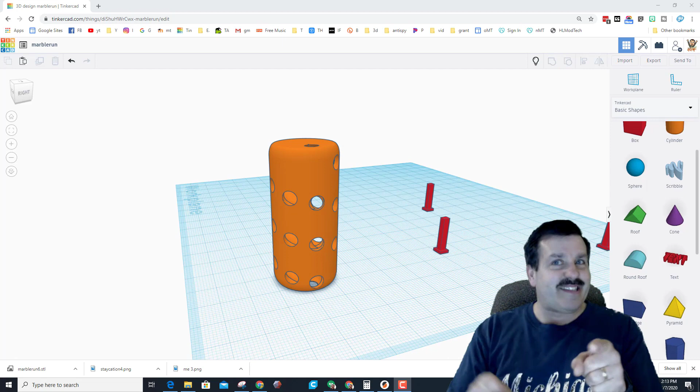So first things first, we are in Tinkercad, and I'm going to duplicate this little dude, set him to the side, and let me ungroup him so you can see what he's made of. If I take his outer skin and hide it, you can see that is a tube. So it's easier for you to see the tube, instead of making it a hole, I'm going to make it a solid for a second.

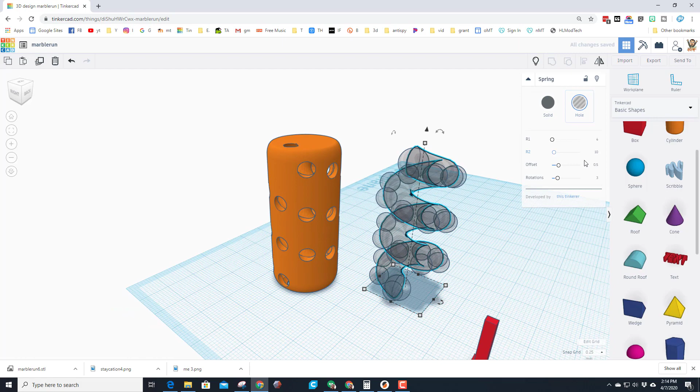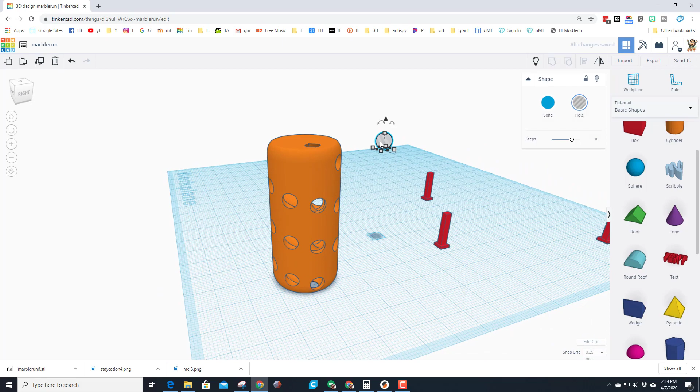So I made a gray tube that is a little bit larger than an airsoft pellet. And then I put these spheres around that are a little smaller than an airsoft pellet, so that when I group it all together, we get this awesome design over here that has a track for an airsoft pellet to run through. So when it is finished printing, the goal was for it to have that cool track that the pellets can go up and down, yet there won't be a hole to get the pellets in.

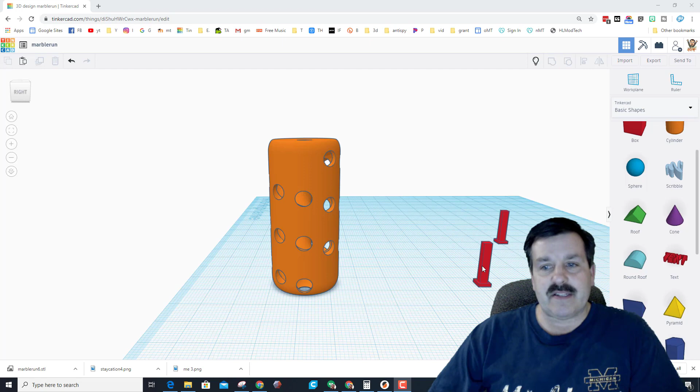So the whole idea was that as it was printing, I would drop the little airsoft BBs in, kind of like the ship in a bottle where you have to ask how the ship got in there, but I would have airsoft BBs inside here. The trick for me was I built this little pillar over here off to the right so that the print head would have to move over.

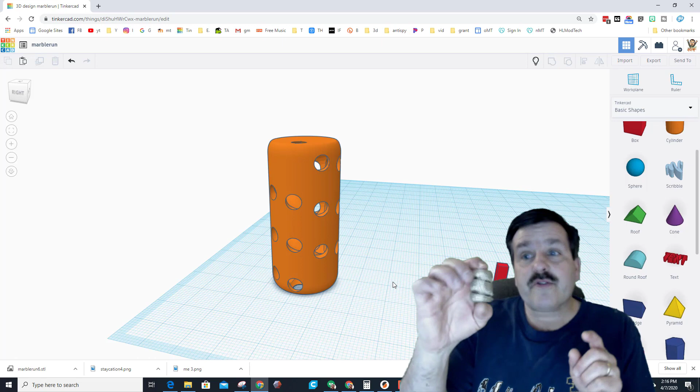Now I'm going to be honest with you, my first design didn't have that. I actually forgot the print head would be in the way and thought I was going to be able to just make that work. But once I added this in, I was able to make it do what it was supposed to. So there were other trials and errors too. This was one where the entire way up I had the design of the tube sticking out, but there was way too much stringing because that was hanging down below, but still kind of a neat idea.

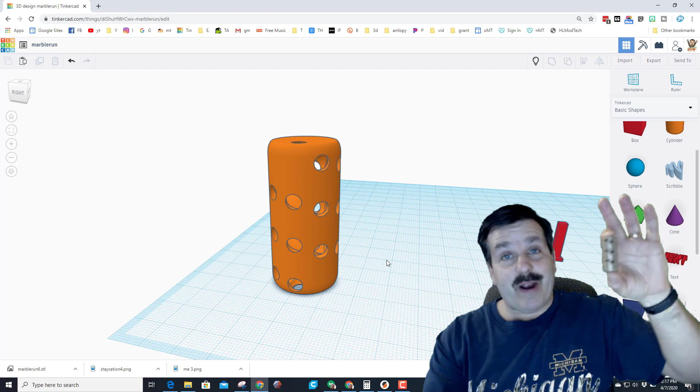So alright, here is the final one. When I flip this over, they run down the channel. You can see there's a blue one and a green one in there. I could have stuck in more. You do have to time it right. I'm not going to lie to you. I have had several times where I started printing this, got busy with something else, and I missed it.

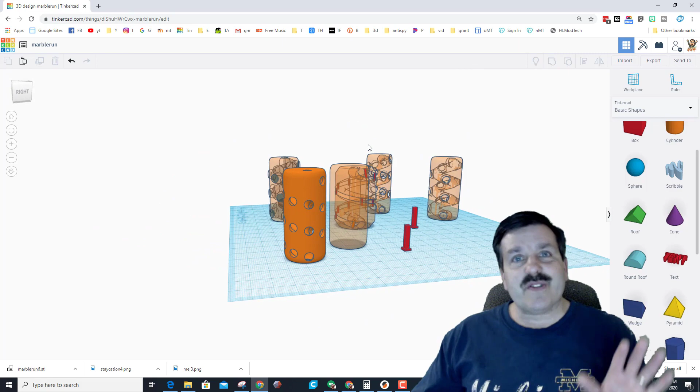I do think it's pretty cool, and I had a lot of fun learning as I designed it. If I zoom out real quick and I do show all, you will see that this was version 6 before I finally came up with one that worked the way that I wanted. And the other super cool thing about this, the entire time I had used the send to command, and I had generated a link, and Chris over in Germany was actually working with me together as we solved the way to make this actually turn out the way that it did.

Alrighty, friends, so I hope you enjoyed the video and maybe it gives you ideas of what kind of cool things you can create as well.